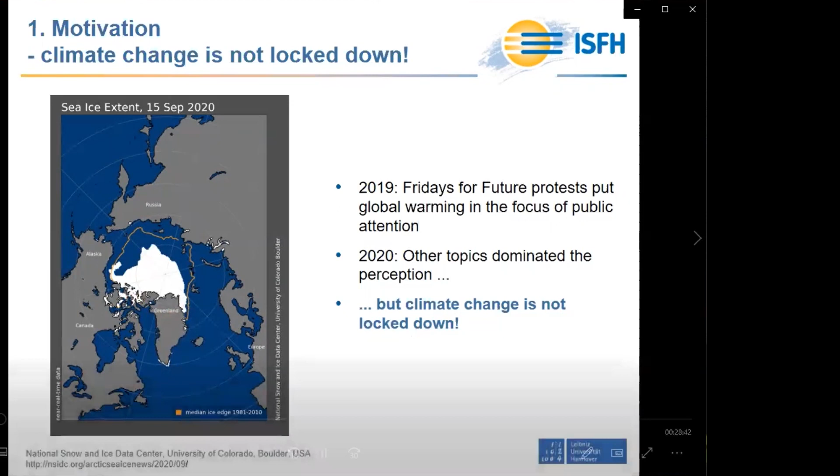As you can see here in this left-hand picture, for example, in the extension of the Arctic sea ice. It's shown here for September 15th this year. It's the white area, and you can also see the orange line, which represents for comparison the 30-year average of the Arctic sea ice extension at this point in time of the year. And this year, the Arctic sea ice extension was the second lowest ever recorded. That means that global warming is progressing, and it also means that we have to progress with the deployment of PV.

In this talk, I would like to focus on the technical question whether it's possible for a new player in this field to differentiate from the mainstream via a specific cell technology. This question is actually very difficult to answer because so many different solar cell technologies exist. To assess them systematically, I suggest focusing on their junction schemes. You all know that every solar cell requires two carrier-selective contacts. One is required to extract the electrons from the conduction band, and the other one is required to extract the holes from the valence band.

As you know, the solar cell has two contacts, and therefore you need to calculate a combined selectivity according to this equation. And as shown by Rolf Brendel et al., this combined selectivity can be correlated to an efficiency limit which is implied exclusively by the contacts. That means the solar cell is considered otherwise as ideal.

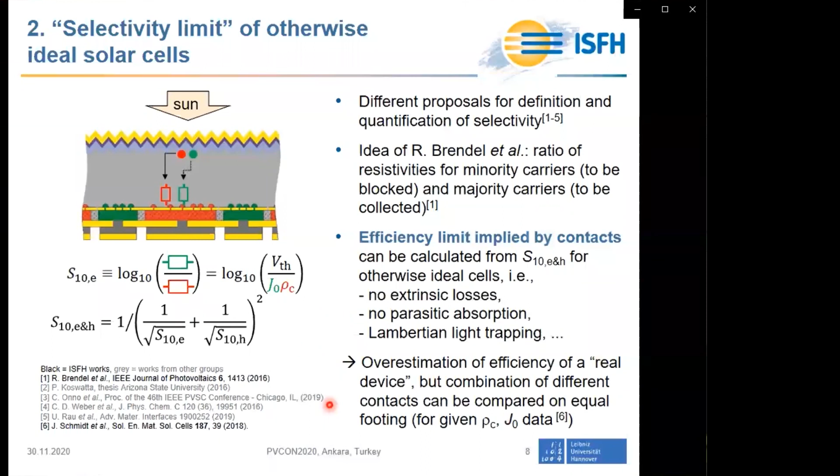No other extrinsic losses are taken into account, no parasitic absorption in these contacts is considered, and perfect Lambertian light trapping is assumed. Of course, this approach will yield an overestimation of the efficiency of a real device, but it nevertheless allows for a comparison of different combinations of contacts on equal footing for a given experimentally determined set of ρC and J0 data.

With this approach, we screened different contact schemes, electron collecting contacts and hole collecting contacts. We include different variations, including diffused junctions, for example phosphorus diffused junctions. We also include amorphous crystalline silicon heterojunctions, polysilicon and oxide based junctions, and also metal oxide based junctions. In total, this results in a very large table, but let's focus on the most relevant cases.

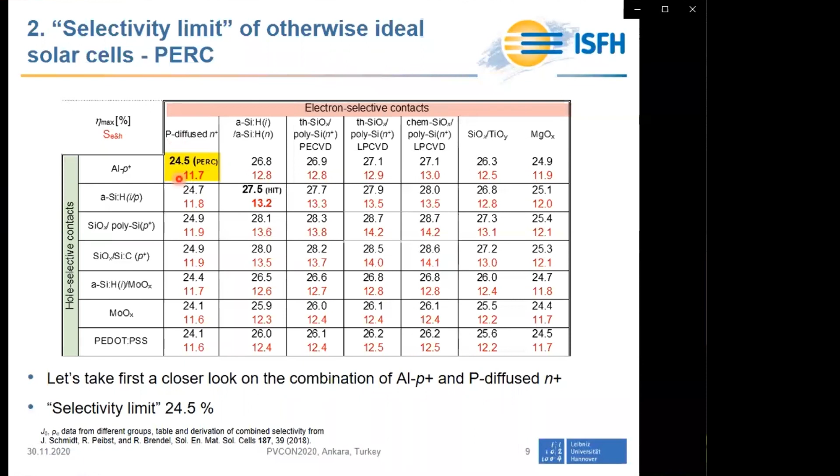The industrially most relevant case is the combination of a phosphorus diffused n-type emitter with local aluminum p+ hole collecting contacts, because this combination is implied in the so-called PERC cell, which is the workhorse of today's PV. For this combination, we calculated a combined selectivity of 11.7 and a resulting selectivity limit of 24.5% for the given J0 and ρC data as specified in this work.

Let's briefly consider the current status of this contact combination. As already mentioned, it's implemented in the so-called PERC or PERC+ cell structure as shown here. It was proposed already in 1989, and it has been transferred to mass production in the last years. The market share today is around 70%, and it's actually increasing.

The energy conversion efficiency of this cell concept has been improved almost linearly with time in the last years, with a rate of around 0.5% absolute per year, and it reaches now values of slightly below 22% for the leading companies. In 2019, already efficiency values above 24% have been announced for record R&D PERC cells.

It's worth mentioning that a PERC cell can become bifacial by not printing the aluminum on the entire rear, but rather printing aluminum fingers. We call this concept PERC+. And by this bifaciality, you can gain an additional energy yield of around 10% on an annual average at the latitude of Germany. And of course, the benefit will be even higher in more sunny regions.

All these features together make the PERC cell and this specific contact combination a very tough benchmark for any other cell concept. Nevertheless, it also has some inherent weak spots, in particular the recombination in the phosphorus doped n+ region, in the passivated regions, but also and in particular in the metallized regions, is significant and poses a certain efficiency limitation.

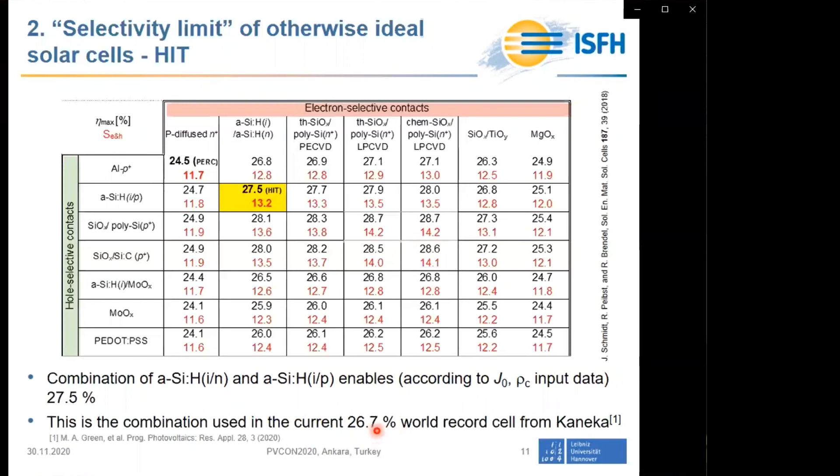and then a selectivity limit of 27.5%. And this combination is used, for example, in the current world record cell for crystalline silicon single junctions from Kaneka, which reaches an efficiency of 26.7%. So it's rather consistent with our simplified consideration.

Also for this technology, let's briefly consider the current status. Heterojunction cells are not a very new concept, but were rather proposed already a long time before. But currently, the mass production of heterojunction cells seems to gain momentum, as you can see here on this world map, showing different players in the heterojunction field.

The current R&D record for a heterojunction cell, full area measured, is 25.1%, achieved by the company Hanergy, and the median in mass production, for example at Meyer Burger, is above 24%. This technology has nevertheless also some weak spots. In particular, the capex is higher than for PERC.

Okay, let's move on to another very promising combination of electron selective contacts and hole selective contacts. In this case, consisting of a stack of a thin interfacial oxide covered with either P-type doped polysilicon for the case of hole collecting contacts, or N-type doped polysilicon for the case of electron selective contacts. These polysilicon layers may also contain other components such as carbon.

For all of these combinations, we obtain very high combined selectivity values, exceeding values of 14, and the corresponding selectivity limit is also very promising. It exceeds values of 28%. This combination of contacts was actually implemented also in our 26.1% cell, which is still the record for a homojunction silicon single junction cell.

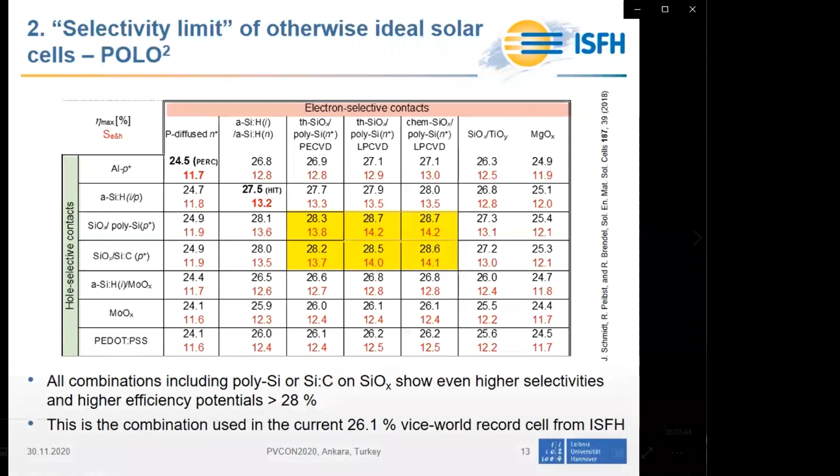Also for this contact combination, let us consider the current status of the technology. Before, I would like to spend some words on the history, because I would like to acknowledge that this junction scheme originates from the bipolar junction transistor community, where it was developed already in the 1970s. It was already applied on solar cells in the 1980s with rather moderate cell efficiencies, and then it was apparently forgotten for a long time.

Apparently means that companies such as SunPower may have worked on this junction scheme in the meantime, but they never disclosed it. For public photovoltaics, this concept was rediscovered in 2013 by ISFH and Fraunhofer ISE together at the same conference. Meanwhile, this has become a mainstream technology, and numerous groups and companies worldwide obtain excellent results.

Regarding the cell structure, for an implementation of both a polysilicon oxide junction collecting holes and a polysilicon oxide junction collecting electrons, the simplest cell structure you can think of is a double-side contacted cell with an unpatterned polysilicon oxide junction on the front and on the rear. In this case, the polysilicon layer has to be very thin, because otherwise you would suffer from parasitic absorption, and this thin polysilicon layer may need additional conductivity provided by a TCO.

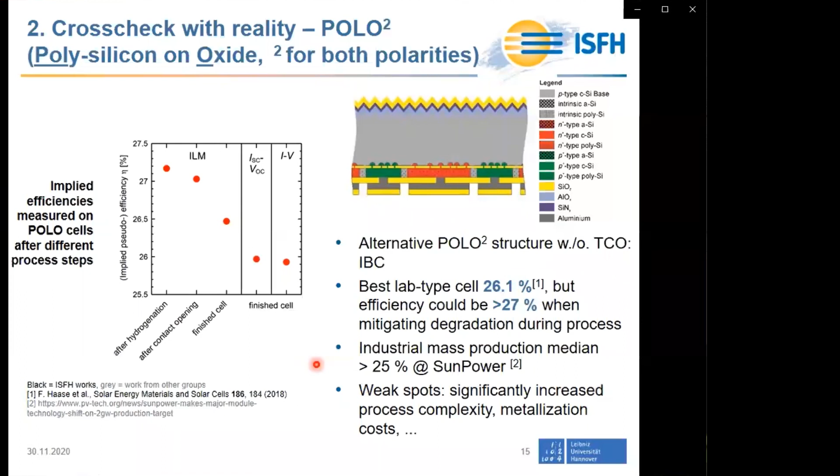Okay, let's move on with the combination of a polysilicon oxide junction with a conventional diffused junction. The most prominent cell structure including such a combination is the so-called TOPCon cell structure, which combines a conventional diffused boron front side emitter with a polysilicon oxide electron collecting junction on the rear. Unfortunately, we have missed the boron emitter here in the screening. Nevertheless, we think that the results for this combination are pretty much comparable to the results for the mirrored polarity case.

However, I also would like to acknowledge that on lab scale, even higher efficiencies up to 25.8 and 26% have been achieved. That means that some components, probably in particular the boron emitter, have better properties than we assumed for our selectivity screening.

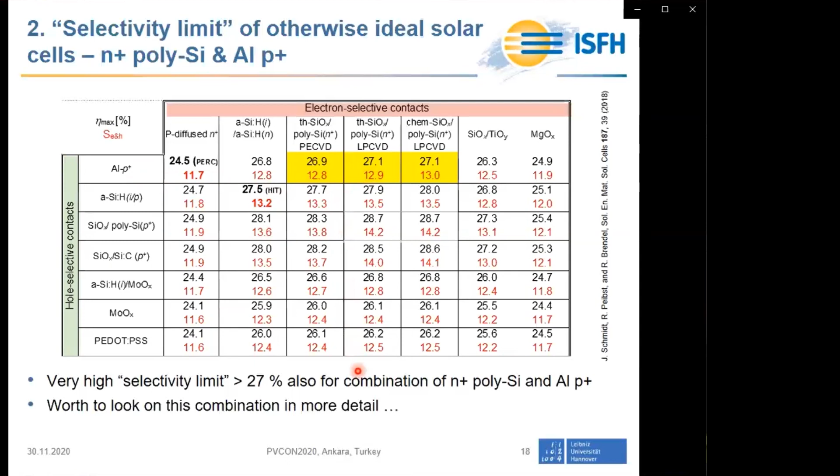To get a realistic assessment of the efficiency potential of this specific combination of an electron-collecting polysilicon oxide junction and a hole-collecting P+ region, we perform numerical device simulations to include all relevant extrinsic losses. We use the Quokka 2 implementation of the conductive boundary model and combine it with a synergistic efficiency gain analysis. The optical generation profiles are calculated by the ray tracing software Sunrays by using experimental n and k data for each layer, in particular also for the polysilicon.

One possible cell structure comprising this combination of an electron-collecting N+ POLO junction with the hole-collecting aluminum P+ regions is this POLO back junction cell as shown here. It features aluminum fingers on the front side, just like the rear side of a PERC+ cell. The simulated efficiency potential, according to our numerical device simulations, is 24.7%. This is lower than our selectivity limit of 27% for this contact combination, and the reason for this difference is that we here include all relevant extrinsic losses. Nevertheless, this efficiency potential is quite high, and it's significantly higher than that for the PERC benchmark.

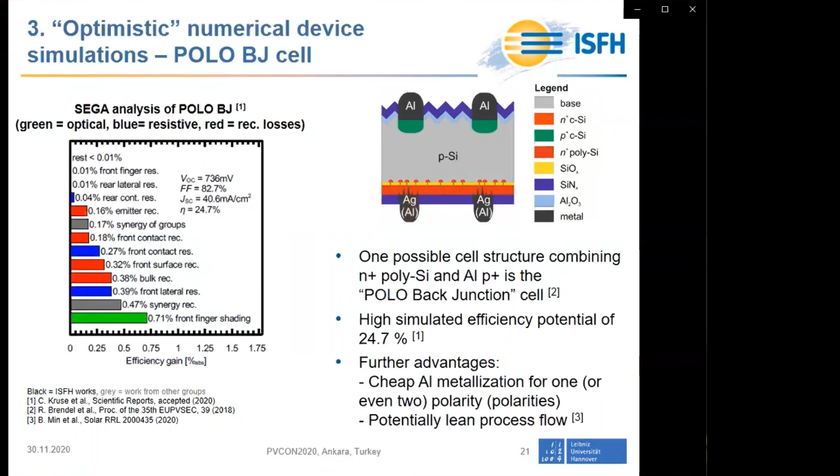To establish the ground contact, I would like to show you our recent experimental results for industrial POLO back junction cells. We have been working on this cell structure for almost 1 year now, and we already achieved an efficiency of 22.6% on full M2 wafers, as confirmed by ISFH CalTeC. In particular, the open circuit voltage is already quite promising. It reaches values of 716 millivolts, which is the highest value reported so far for P-type wafers with aluminum P+ regions. Of course, the simulated efficiency potential is not yet fully exploited, and the major reason for this discrepancy is the aluminum P+ regions, as shown here in this cross-section SEM image; the bright areas are the P+ regions.

They are quite narrow, surprisingly narrow, and not as good as we measured on test structures. One reason might be that for the full cell we also have to find a compromise for the firing temperature for the front side and for the rear side, and therefore the BSF formation is not yet as perfect as measured on our test structures. Nevertheless, we are making good progress here, and we are confident to improve our results quite soon.

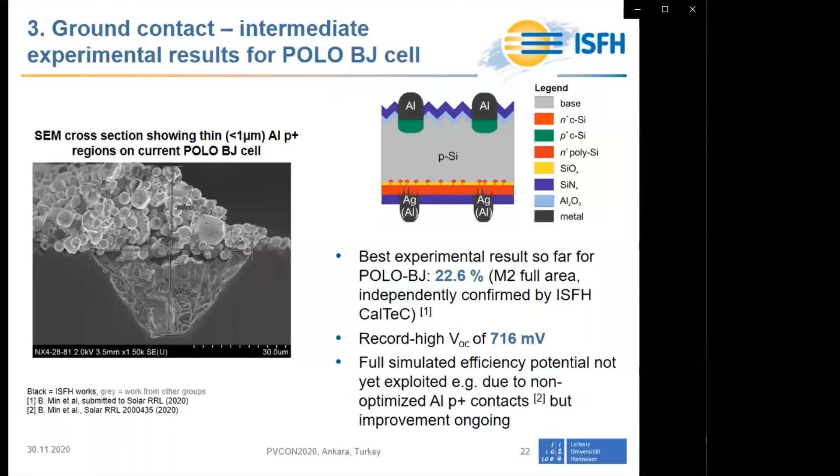Another interesting cell structure comprising this combination of electron collecting POLO junctions with local aluminum P+ regions for hole collection is this IBC structure shown here, which we call POLO IBC cell. For this cell structure, the simulated efficiency potential according to our numerical device simulations is 25.5%, including all relevant extrinsic losses. And this is very promising.

The synergistic efficiency gain analysis is shown here in the left-hand graph, and you can see that the optical losses due to finger shading have disappeared, of course, because it's an IBC cell, and the most relevant loss channels are recombination induced. There is a gray bar here, and this corresponds to the synergy of all recombination loss channels. That means, due to the leaky bucket principle, you could achieve an even higher efficiency than the sum of all recombination losses if you succeed in suppressing all recombination losses at once.

Again, the same advantages account here as for the POLO back junction cell, although the cell processing is a bit more complicated than for the POLO back junction cell. Nevertheless, it is still as lean as for the PERC cell.

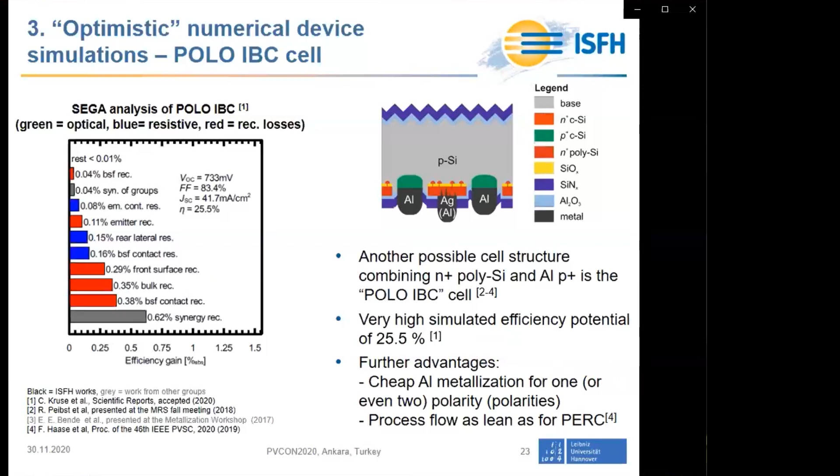For an at least almost complete overview on the different cell structures and junction schemes, I think it's necessary to also include silicon perovskite tandem cells into the discussion, because the development of this technology is really impressive. You're probably all aware of the current record of 29.1% achieved by HZB, which outperforms the record for silicon single junction cells already by far. Nevertheless, I think it's fair to remark that silicon perovskite tandem cells still have a long way to go to become mature and competitive with silicon single junction cells for industrialization. Nevertheless, let's assume that they are successful.

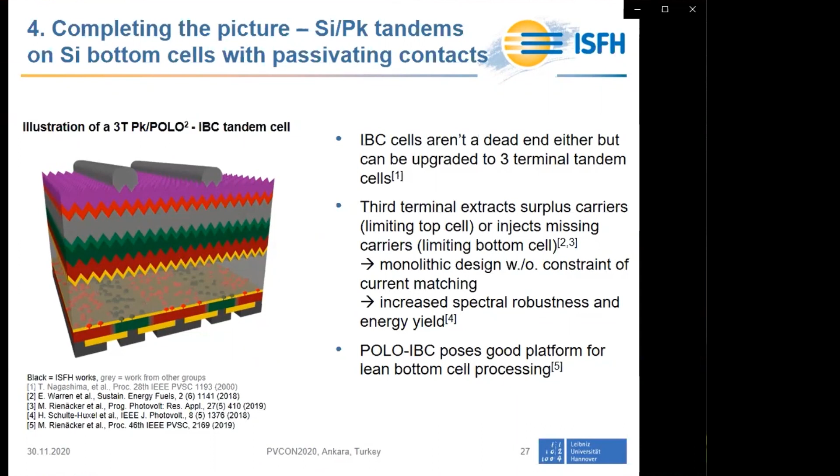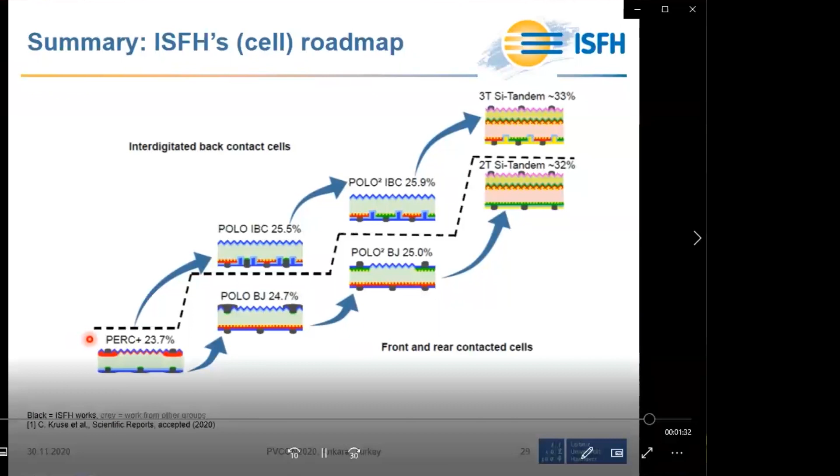As a summary, I would like to present you ISFH's cell roadmap. This cell roadmap is a consequence of all these considerations I've presented you previously in this talk. ISFH's background is identical to the current mainstream in crystalline silicon photovoltaics. It's in the PERC and PERC+ technology. And for this cell, we simulated an efficiency potential of 23.7% based on our numerical device simulations.

As I have reported, we are currently substituting this phosphorus-doped emitter by an electron-collecting n+ polysilicon oxide junction, either in this IBC configuration or in this POLO back junction configuration. For both cell structures, we obtain very high simulated efficiency potentials, and we think we are also on a good track with our experimental work.

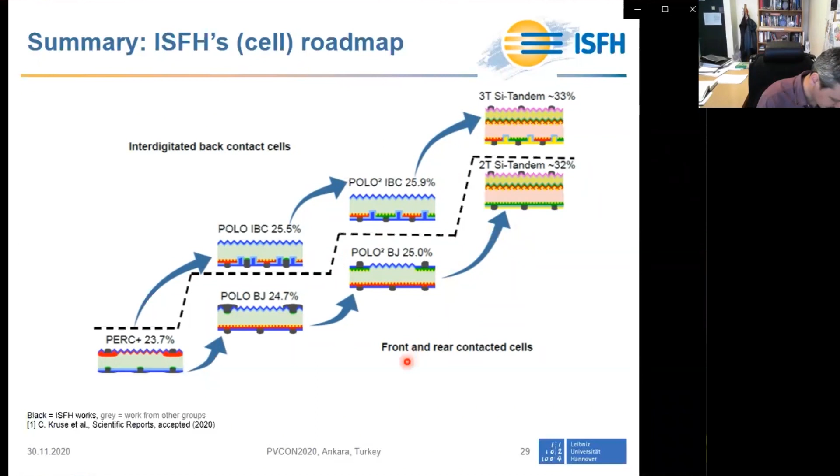We furthermore work also on smart concepts how to implement the second polarity also as a passivating contact by substituting the aluminum p+ region with a hole-collecting polysilicon and oxide junction, either in this double-side contacted configuration or in the IBC configuration. For both cases, eventually we can upgrade our cells to tandem structures by combining them with perovskite top cells to either a 3-terminal tandem device or a 2-terminal tandem device. We think that this stepwise approach offers a good compromise between risk minimization and innovation for each step.

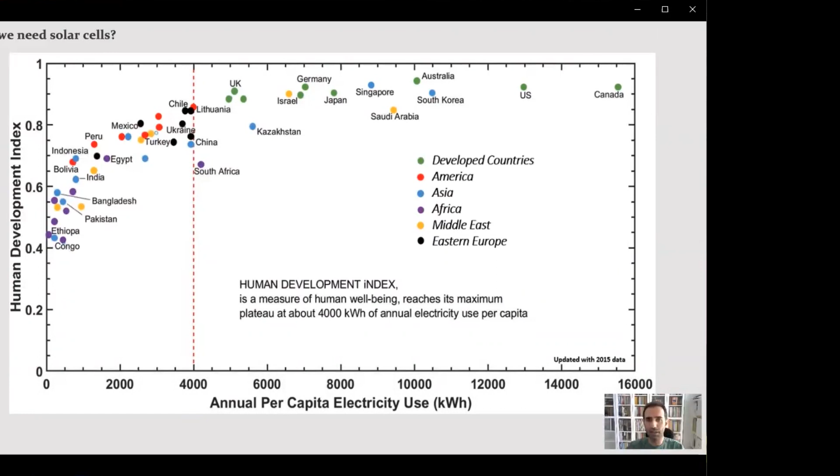This graph shows the Human Development Index versus annual electricity consumption per capita for countries in the world. HDI measures the quality of life. As you see, all developed countries like US, Canada, UK are at the top of the HDI and consume up to 15,000 kilowatt-hour electricity. However, the most populated countries such as China, India, Indonesia are still behind the 4,000 kilowatt-hour mark. Keeping this in mind, the next graph shows the electricity consumption versus per capita income instead of HDI.

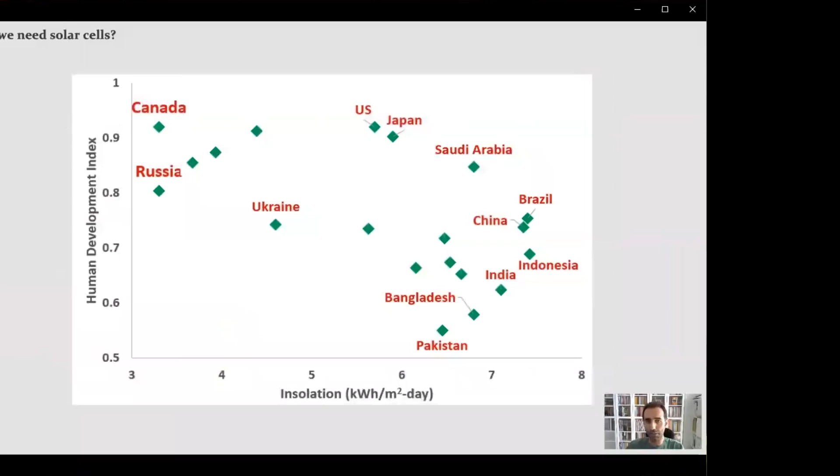Fortunately, surprisingly actually, all the countries that are ranked at the bottom of the HDI graph are at the top of the insolation map. India and Indonesia are more than 7 kilowatt-hour per meter square a day. And this is good news. The next question is whether solar resources are big enough to power the world. And the answer is yes. These circles are proportional to real values. The sun produces 23,000 terawatt per year while the world needs only about 16 terawatt. These circles also tell us why we need to favor solar among the other renewables, because it's a much bigger resource.

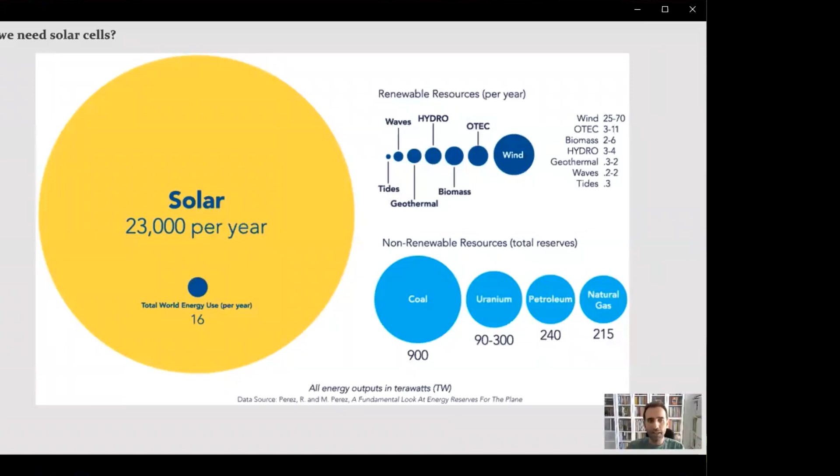So how do we utilize solar energy? One way is to use photovoltaics. A photovoltaic device is one particular embodiment of solar energy where it converts sunlight into electricity without generating any polluting byproduct. A solar cell is an optoelectronic semiconductor device in which, optically, the reflectance and shadowing on the illumination side of the cell need to be reduced. Electrically, the recombination at the surfaces and the bulk and the internal series resistances must be low. There are different types of solar cells, such as wafer-based and thin films. There are new generation technologies like perovskites, organic and quantum dot solar cells. My focus will be on crystalline solar cells.

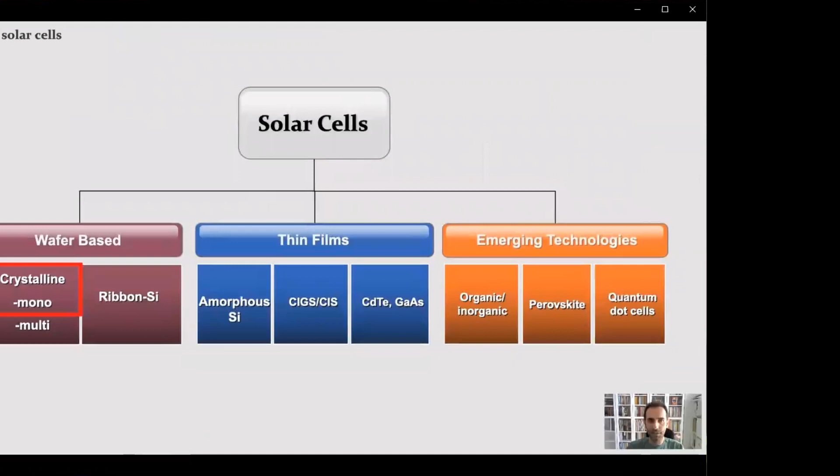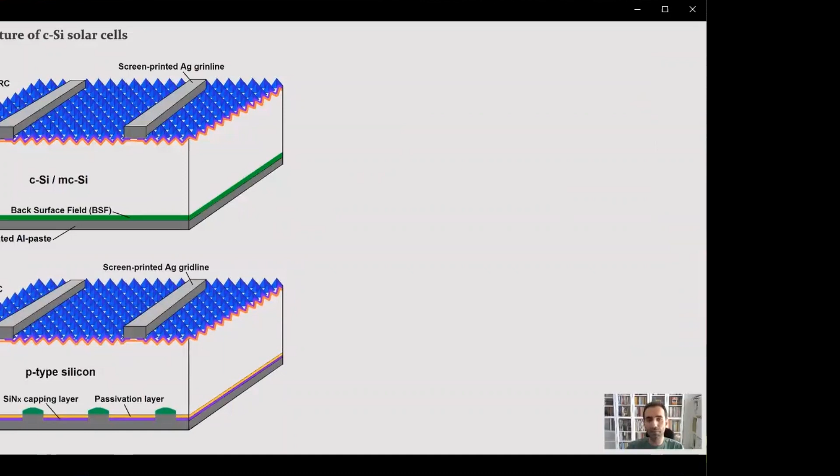In crystalline solar cells, there are also different architectures to better the performance. The first one is the aluminum back surface field structure that has a full aluminum back contact. It has passivation on the front surface and back surface field formation on the back side because aluminum alloys with silicon during high temperatures. This structure is the most common one in the industry because of its simplicity. The second one is the passivated emitter rear cell, or PERC structure, that is very similar to the aluminum BSF, except that there is a passivation stack layer on the back side and the back contact is local instead of full.

Interdigitated back contact is the next one. The fundamental improvement of the design of the IBC cell is zero metal shadowing on the front side, so the current would be maximum. And since the contacts are on the back side, series resistance can be lowered by increasing the width of the back contacts. The last is heterojunction with intrinsic thin layers. The silicon wafer is sandwiched between two intrinsic amorphous silicon thin films to maximize the open circuit voltage. The focus of this presentation will be the PERC type because it is the rising star in the PV market, predicted to surpass the aluminum BSF cell market share in the near future.

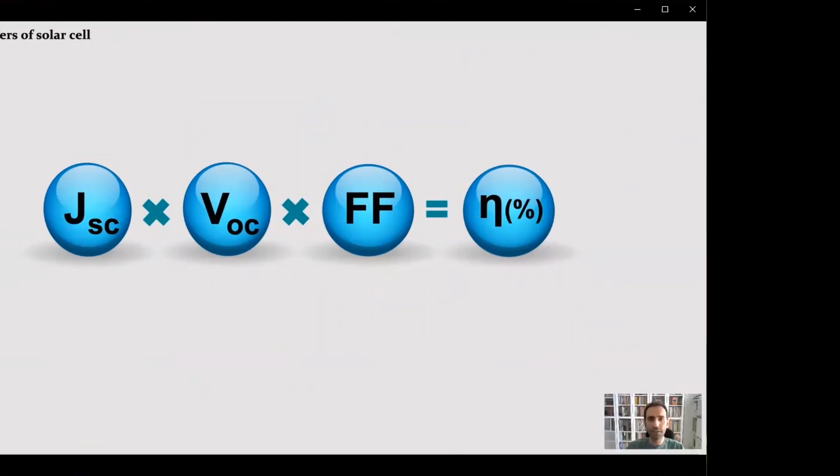Rather, it's all about the cost and performance. What is the measure of the performance? It is the efficiency that is the product of three parameters: short circuit current, open circuit voltage, and fill factor. This means that to increase the efficiency, all the three parameters must be increased simultaneously.

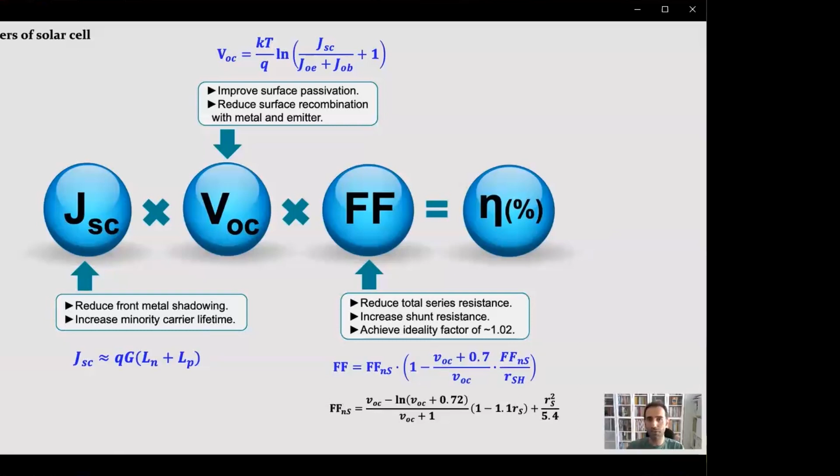To increase the short circuit current, we need to reduce the front metal shadowing and increase the minority carrier lifetime. Open circuit voltage is a function of short circuit current and can be increased by improved passivation and reduced recombination. Fill factor is a function of open circuit voltage, series resistance, and shunt resistance. To achieve high fill factor, we need to reduce total series resistance and increase the shunt resistance.

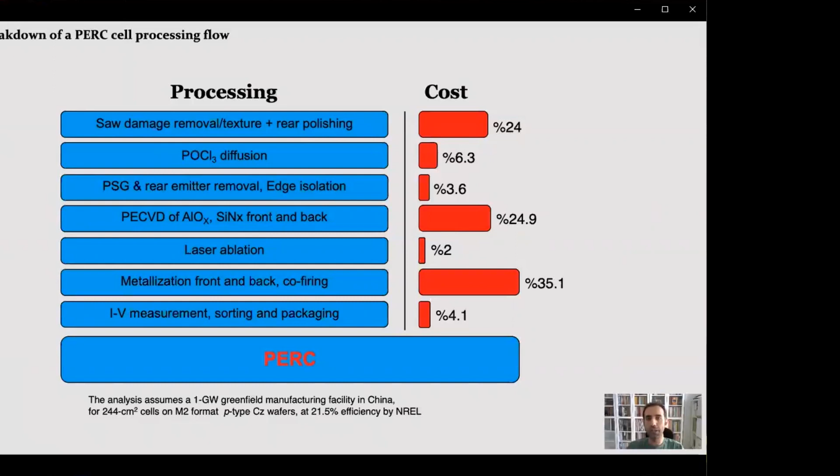For PERC cells, it is only 35.1%. So that's why the metallization of a silicon solar cell is an important task to tackle to be able to lower the cost. Besides metallization cost, it also affects so many variables in a solar cell. Metallization has both optical and electrical impact on a solar cell. Optically, the shadowing loss can make or break the cell, depending on the grid line and busbar width. And electric-wise, the components of series resistance, like grid line and contact resistances, can be affected by the metallization.

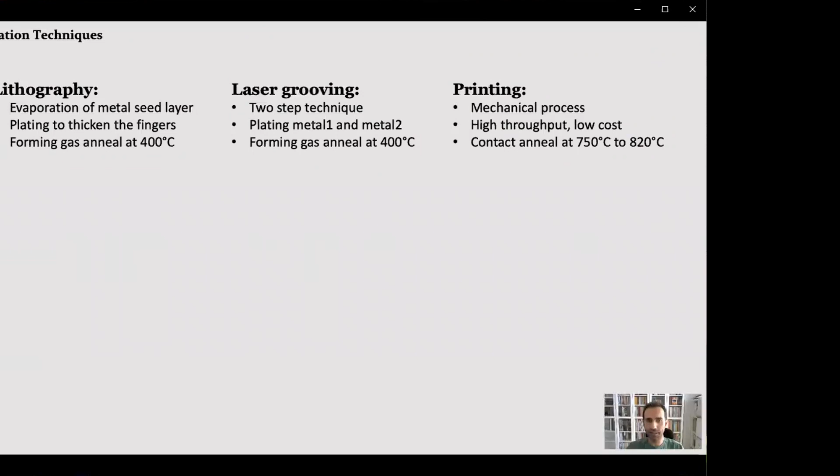There are different ways of metallization of solar cells, such as lithography, laser grooving, plating, and printing. Lithography uses a mask and a UV light source. On the other hand, laser grooving utilizes the laser and plating at the same time. Plating itself is a chemical process, and chemical waste is its biggest problem. Also, low throughput of these techniques is another big challenge to tackle. On the other hand, printing can have as high throughput as 4,000 solar cells per hour, which is a big plus, and also its simplicity is what attracts the market the most.

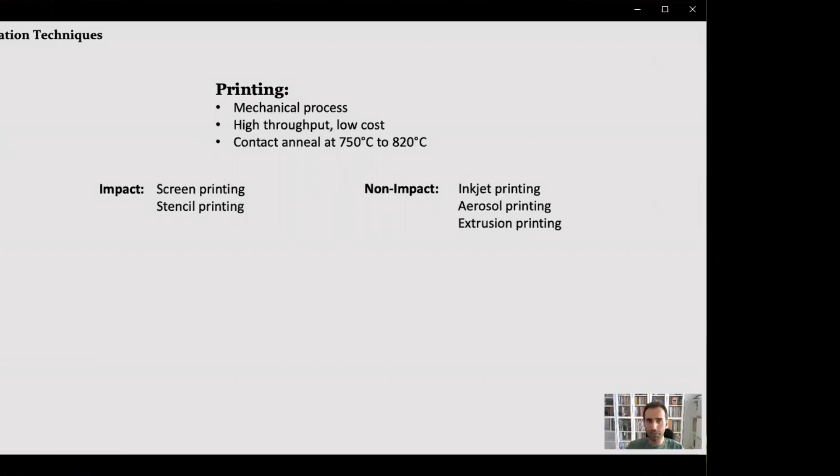Printing can be categorized as impact and non-impact printing, which points out if the process happens by touching the solar cells or not. Non-impact includes inkjet printing and aerosol printing. Even though these are promising techniques, there are no proven industrial level machines. Impact printing includes screen and stencil printing methods that are very similar to each other. Of all these, screen printing is what dominates the market. It is the most mature, best established solar cell metallization technology.

The basic principle of the screen printing process is simply to use a mesh screen to produce the same pattern over and over again on silicon wafers with a metal paste. During the printing, paste is first applied to the screen before the movement of the squeegee. As the squeegee moves the paste across the screen, a shearing action causes a decrease in viscosity, allowing the paste to pass through the mesh openings to the desired silicon substrate. The main factors that influence the printing quality are related to the screen, squeegee, and the metal paste.

Metal particles provide the conductivity since they are the metal bulk. Glass frit etches through the anti-reflection coating layer during contact firing. Because the paste is printed on the ARC layer and the metal should make a contact with the emitter, the ARC layer should be etched. Organics and solvents, on the other hand, account for the rheology of the paste, like how viscous it is or its printability. For the backside, thin aluminum paste is used and screen printed on the backside.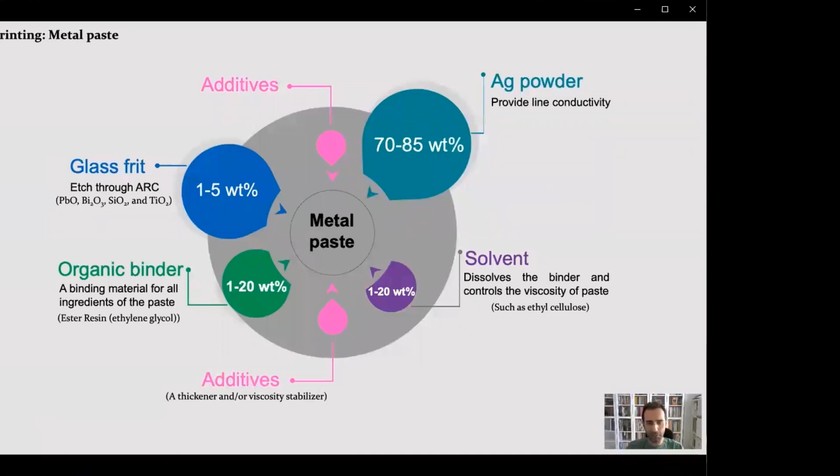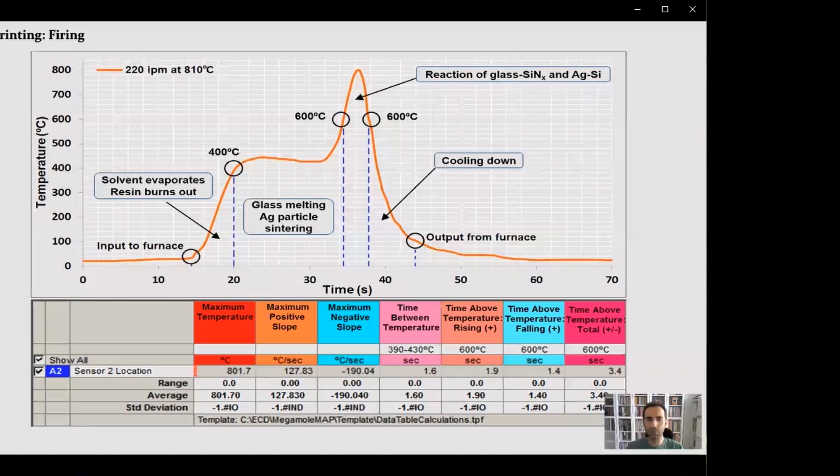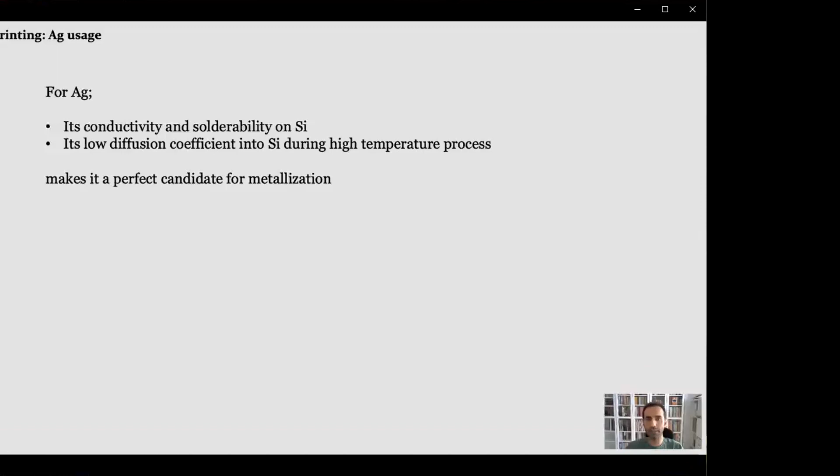Screen printed silver contacts have been the most utilized metal because of silver's excellent conductivity and solderability onto silicon. Its relatively low diffusion coefficient into silicon guarantees good contact with the substrate. Despite its great electrical advantages, its cost corresponds to almost 40% of the total cost. This is proportional to the width of the fingers, because the wider the finger, the more silver is used.

For example, in early 2000, the contact width was around 200 micrometers, and that corresponded to almost 350 milligrams of silver per cell. As of today, with improvements in screen printing and optimization of the pastes, the average width is 45 to 50 microns, which is around 100 milligrams per cell.

Considering that the purpose of the PV market is to dominate the energy supply, the amount of silver adds up when the market grows. The Silver Institute recently reported that almost 9% of silver production goes to photovoltaic manufacturing. Keep in mind that today only 2 or 3% of electricity consumption is met by PV. What would happen if this number goes up to 20% or even 30%? Can silver as a precious metal keep up the production? And that's the big question. That's why we need alternatives.

If we are to use screen printing for the next 30 years, as ITRPV reports predict, then these are the solutions we can come up with. Finer line printing to lower the amount of silver, which can translate to less than 15 micron contact width for 50 milligrams per cell. Another option is to use other metals instead of silver, such as nickel and copper. And there is one more option, that is optimization of the interface between silver contacts and the silicon emitter, so the efficiency can be better and the cost can be lower.

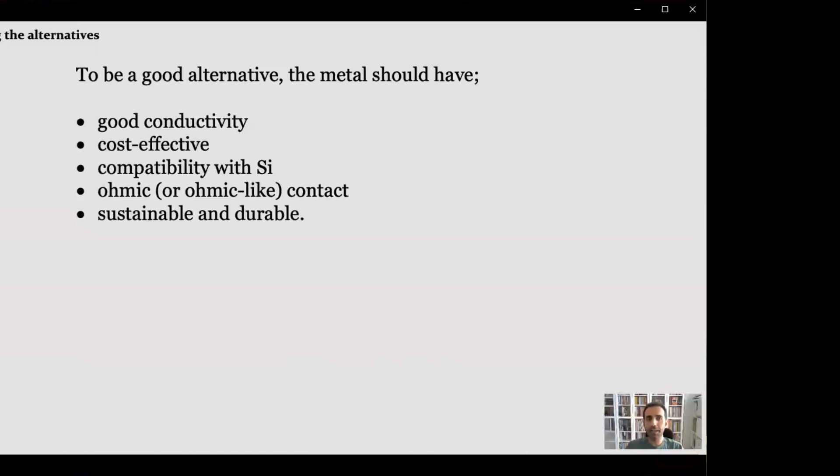After fine line printing, our second option is utilizing alternative metals such as nickel and copper. To do so, there are some criteria these metals should meet. They should have good conductivity, must be cheaper than silver, need to work well with silicon substrates, and should be durable. Most importantly, they should make an ohmic contact with silicon. Nickel and copper are surely cheaper than silver, and they have good conductivity. So let's look at how they work with silicon.

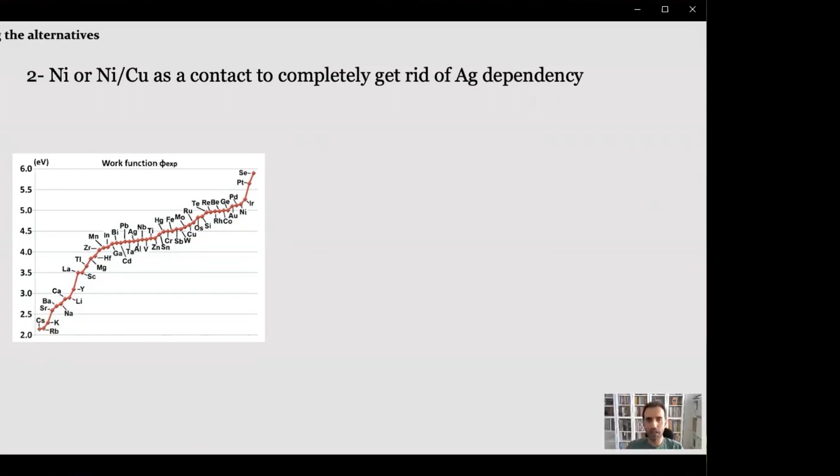This graph shows the work functions for different metals. Considering silicon has a 4.08 eV electron affinity, copper and nickel have higher metal work functions. This will result in a Schottky barrier height that causes the contact resistivity. This detrimental effect is caused by Fermi level pinning. Fermi level pinning arises from the surface states of the semiconductor and happens for most used semiconductors such as silicon.

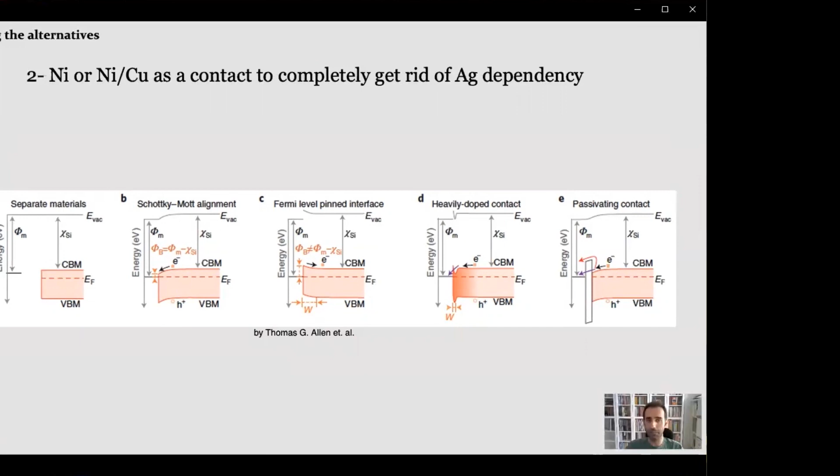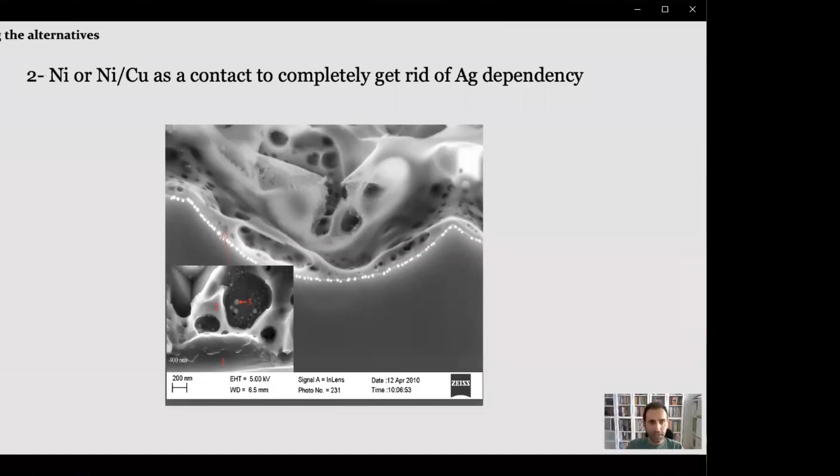But there's also an anti-hypothesis that the glass layer might include some semi-metal nanoparticles that you see in the scheme that can make this residual glass layer obsolete and act as a transition layer for thermionic current flow. So it cannot be acting as a passivating layer when we talk about the energy band diagram.

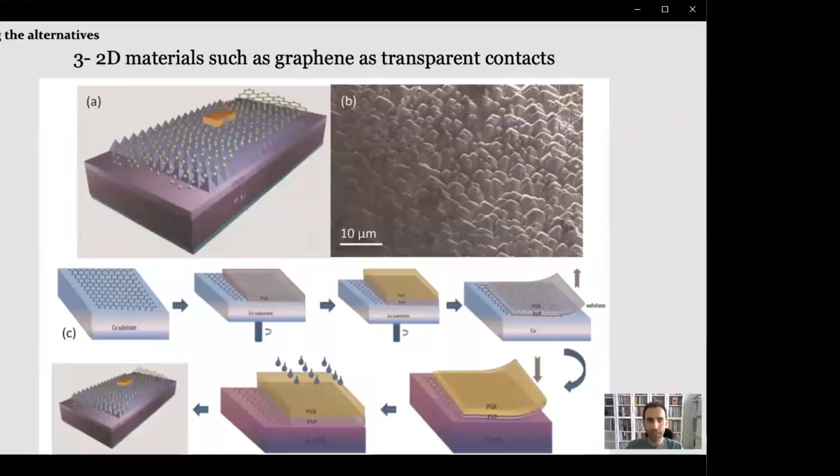So another option to tackle this silver problem is to use 2D materials, such as graphene, as a transparent contact. A new dry transfer method of graphene as transparent electrodes in textured silicon solar cells was recently reported by Yuan Zheng and his group in China. Even though it sounds great to have nothing on the front surface, considering graphene is transparent up to 95%, the technology is promising, but it needs to be developed. As you see, the current density is suffering due to the lack of carrier collection.

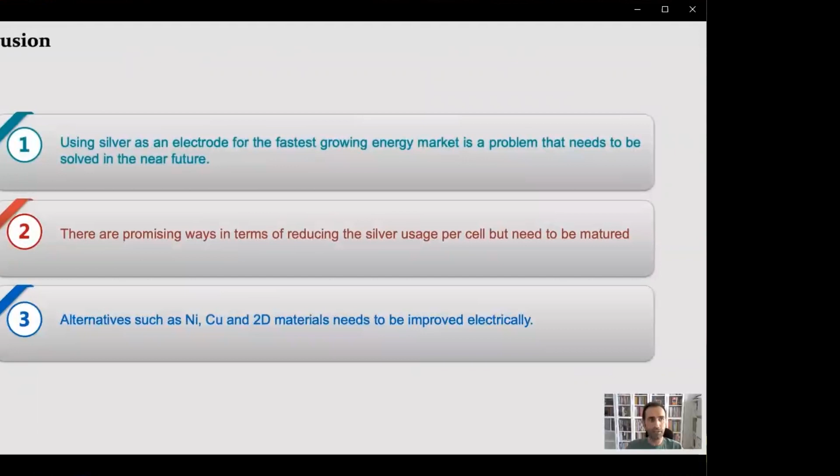So, as you see, there are many studies to challenge the issue silver usage brings to the table, but they are not as mature as current technology, silver contacts, to be adopted by the industry. So I will conclude my presentation with these points. Using silver as an electrode for the fastest growing energy market is a problem, and that needs to be solved in the near future. There are promising ways in terms of reducing the silver usage per cell, but they need to be matured by designing our screens better or by making better paste.

And the third and last option is using alternatives such as nickel, copper, and 2D materials, and they need to be improved. But before they are adopted, they need to be improved electrically, because we cannot afford to lose the performance of the cell in terms of cost saving.

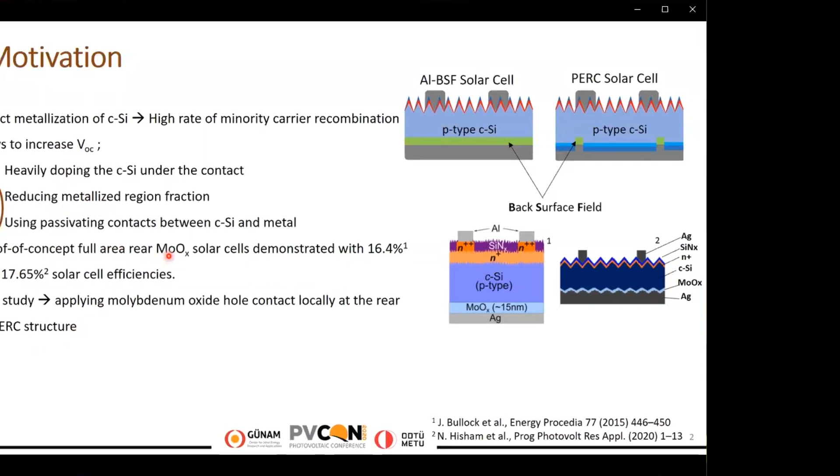So this study focuses on the latter two ways for VOC increase by applying partial molybdenum oxide hole contact at the rear of the PERC structure. Substoichiometric molybdenum oxide's ability to form hole contacts is related to its large work function that promotes hole accumulation at these local regions created.

One of the advantages of using molybdenum oxide instead of directly metallized contacts is the low deposition temperature of molybdenum oxide and subsequent silver rear contacts. This also preserves bulk lifetime together with low thermal budget. Another advantage is increased rear reflectivity, which enhances light trapping. The other advantage is low contact resistivity of the molybdenum oxide/p-type crystalline silicon contact with moderate passivation performance of the molybdenum oxide layer.

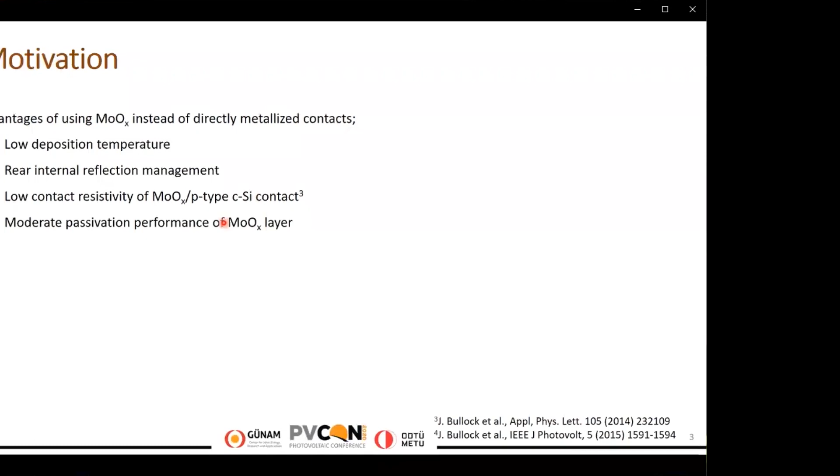Only one work is reported until now where hole collecting molybdenum oxide is utilized in PERC, achieving efficiency over 20%. However, high bulk quality float zone wafers were utilized on small area, 4 square centimeters, and molybdenum oxide/silver rear dot contacts are defined by photolithography, which are not compatible with standard industrial cell processing.

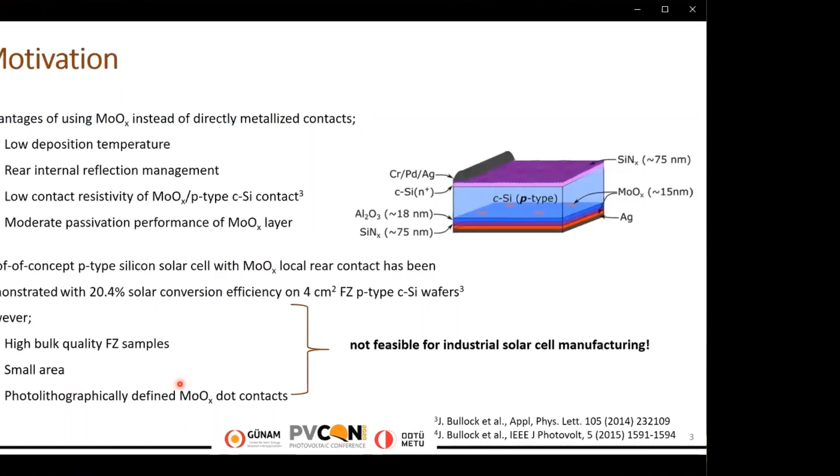So in our design, standard industrial processing and industrial equipment are utilized to fabricate PERC with molybdenum oxide/silver local rear contacts. We started with p-type Czochralski solar wafers with 180 micrometer thickness. Double-side texturing is performed to form pyramid texturing. Then the emitter layer is formed by phosphorus diffusion on both sides. A subsequent rear side doping removal is performed by single-side etching.

The rear side is passivated by 5 nanometer aluminum oxide, followed by activation annealing and silicon nitride capping. The front side anti-reflective coating silicon nitride is also deposited by PECVD. Local contact openings were performed by picosecond laser at the rear side with approximately 7% of total area.

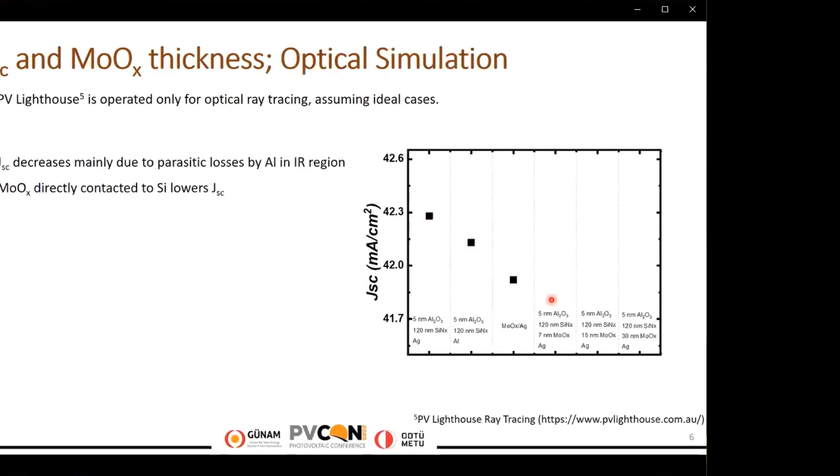First, a 5 nanometer aluminum oxide and 120 nanometer silicon nitride/silver stack is utilized. These are all full area, and JSC decreases when using aluminum instead of silver, mainly due to parasitic losses by aluminum in the infrared region. When molybdenum oxide directly contacted the silicon, JSC lowers, and introducing the aluminum oxide/silicon nitride stack improves JSC when 7 nanometer molybdenum oxide is used, and molybdenum oxide thickness increased to 15 nanometer.

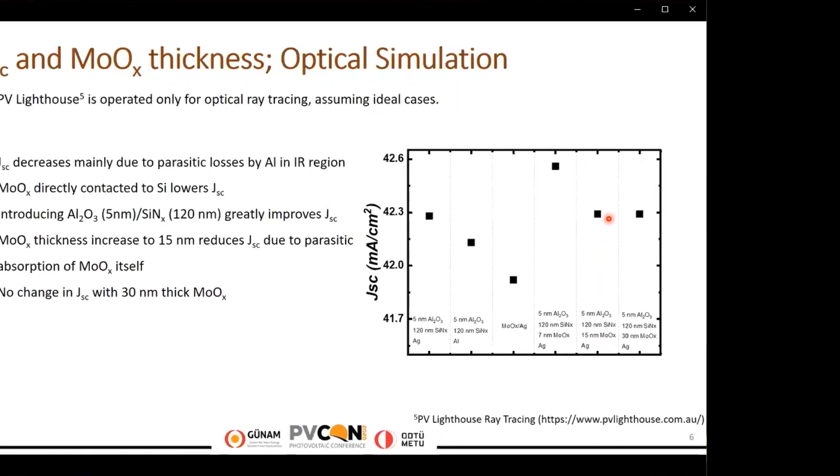And 7 nanometer molybdenum oxide exposes part of the silicon surface to silver, resulting in increased recombination, which leads to low VOC. 25 nanometer molybdenum oxide also imposes extra resistance losses, which causes high contact resistivity and low fill factor, and more parasitic absorption of light due to increased oxygen ion concentration with increasing molybdenum oxide thickness, resulting in modest EQE response and lower JSC.

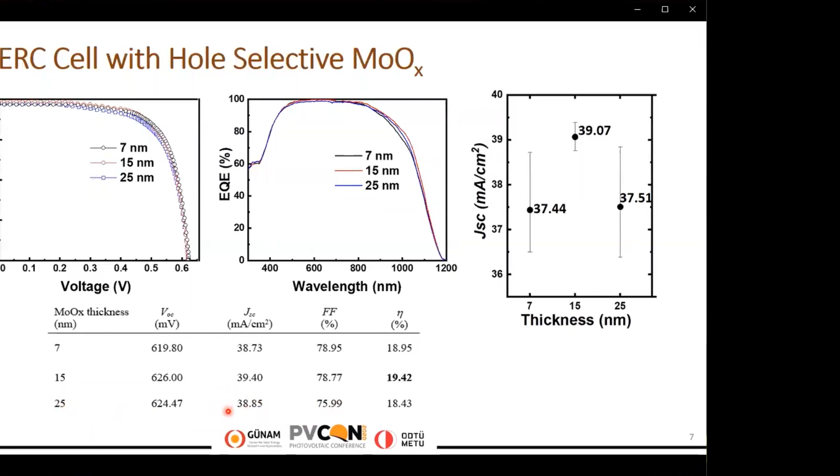Fill factor values show a decreasing trend with increasing molybdenum oxide, as shown in the figure, which is attributed to the increase in the contact resistivity, which is measured by the Cox and Strack method. However, the average fill factor of 7 nanometer thick molybdenum oxide is slightly lower than that of 15 nanometer, while the contact resistivity of 7 nanometer is smaller than the contact resistivity of 15 nanometer.

This suggests there exists local non-ohmic behavior imposing resistance losses arising from the direct contact between silver and p-type silicon through 7 nanometer molybdenum oxide. And this is in line with the low VOC reported from 7 nanometer molybdenum oxide. And 7 nanometer molybdenum oxide cannot fully cover the laser processed surface, resulting in defective local silver-silicon zones with high recombination rates.

And PERC solar cells with 15 and 25 nanometer thick molybdenum oxide exhibit identical VOC values of around 625 millivolts, suggesting better surface coverage for these thicknesses. A clear correlation between different aspects of molybdenum oxides, such as contact resistivity affecting fill factor, surface coverage affecting mainly VOC, and parasitic absorption in the infrared affecting JSC, and PV characteristics is observed. These parameters are shown to be strongly interrelated and dependent on molybdenum oxide thickness.

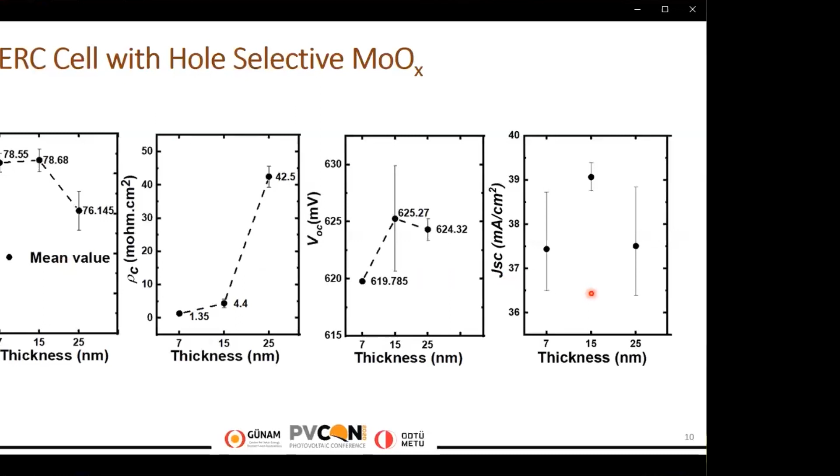In order to improve the open circuit voltage of the PERC with molybdenum oxide solar cells, another cell was fabricated with additional passivation improvements. Starting wafers, texturing, diffusion, and single-side etching processes were kept the same as in previous studies, while 1 nanometer aluminum oxide is added under the front antireflective coating for better chemical passivation on the front side.

The local contact opening was reduced to 3% from 7% in order to compare the results with the optimized homogeneous emitter PERC structure we fabricated with industrial tools. The other steps were kept constant and only one molybdenum oxide thickness was used, which is 15 nanometers, since we obtained the highest efficiency results when using 15 nanometer molybdenum oxide, as already mentioned.

With the additional front-side passivation, VOC enhanced by 11 millivolts, while JSC is around the same values. However, the fill factor reduced drastically, while the fill factor of the reference PERC is higher than the PERC with molybdenum oxide structure. And all the variations indicate the rear contact formation is problematic and needs to be analyzed and developed for further efficiency enhancement.

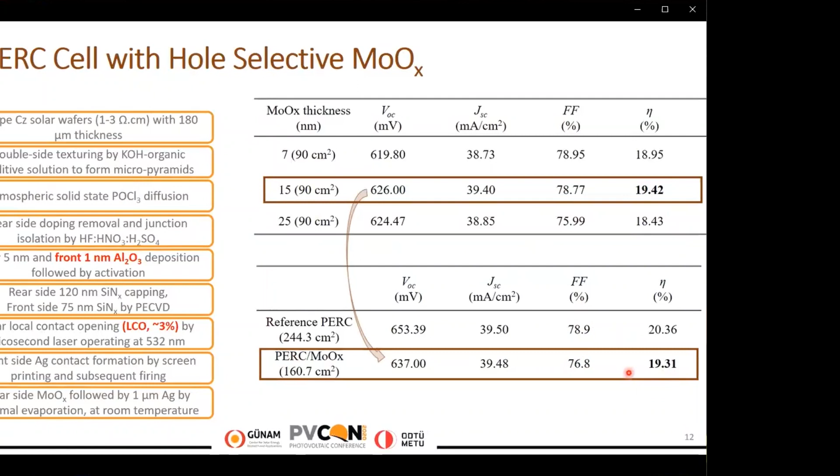But the area of the PERC with molybdenum oxide solar cell is much larger than the record efficient cells, with a little efficiency loss. Still, further optimizations of front-side doping and silicon nitride passivation recipes are needed together with the contact formation analysis. And still, the VOC of the solar cells produced needs to be developed.

For further improvements on VOC, symmetrical passivation structures were fabricated to mimic the rear side of the homogeneous emitter PERC structure as shown. First, the aluminum oxide thickness is varied from 2 to 30 nanometer, applying the two-step activation anneal used in the case of all the produced solar cells up to now. And implied VOC results show that the maintained high passivation level of 30 nanometer thick aluminum oxide is because layers with these thicknesses can themselves provide the hydrogen necessary to achieve chemical passivation of the silicon surface.

And implied VOC improves after firing the 2 nanometer aluminum oxide silicon nitride stack. And this improvement is because hydrogen diffusion from silicon nitride to the silicon aluminum oxide interface is more feasible through the 2 nanometer layer, improving chemical passivation.

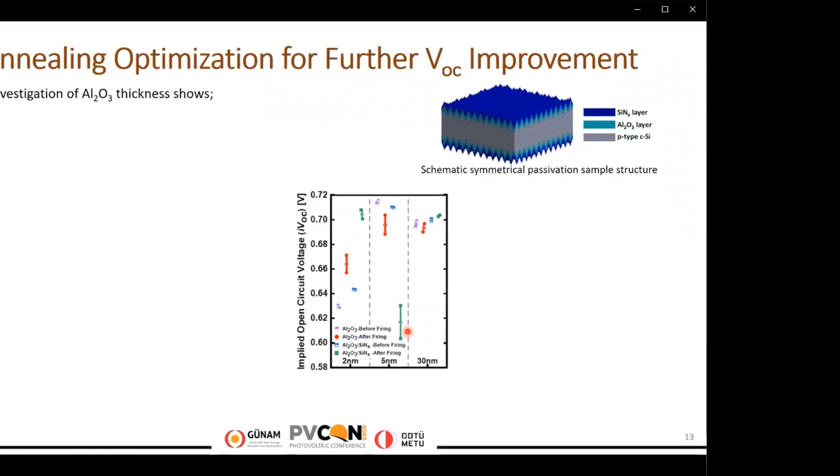On the other hand, the firing reduces the passivation quality of 5 nanometer aluminum oxide, since 5 nanometer may be thick enough to partially hinder hydrogen diffusion from silicon nitride to the interface. Still, there might be potential for the various post-deposition treatments to have different impacts depending on aluminum oxide thickness, especially regarding hydrogen diffusion.

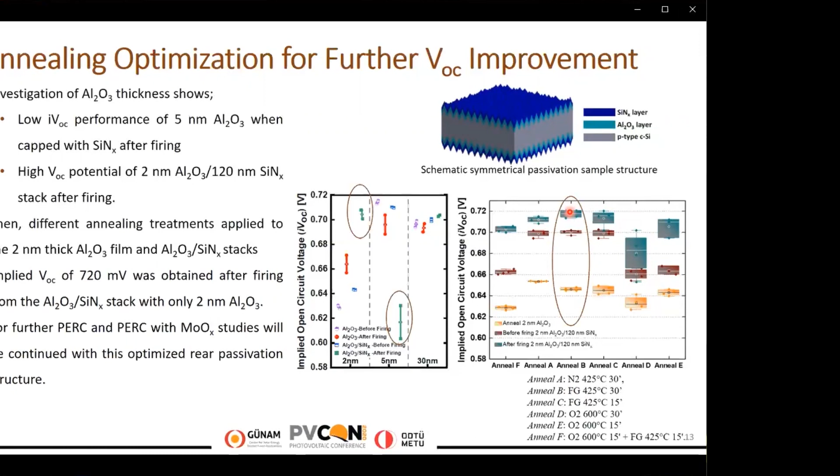Different annealing treatments were applied to 2 nanometer thick aluminum oxide film and aluminum oxide silicon nitride stacks. For 2 nanometer aluminum oxide, forming gas anneal at 425 degrees for 30 minutes seems more advantageous in terms of VOC, reaching implied VOC of 720 millivolts here. So for further PERC and PERC with molybdenum oxide studies, this stack with this annealing will be employed in order to reach higher cell VOC levels.

To conclude, 90 centimeter square, 19.42% efficient PERC with rear local molybdenum oxide silver contact has been realized by industrial tools. Photovoltaic parameters are shown to be strongly interrelated and highly dependent on molybdenum oxide thickness. For VOC improvement, aluminum oxide thickness and activation annealing studies were performed and will be utilized in the upcoming studies. And fill factor improvement will also be addressed for the rear side of large area PERC with molybdenum oxide structure.

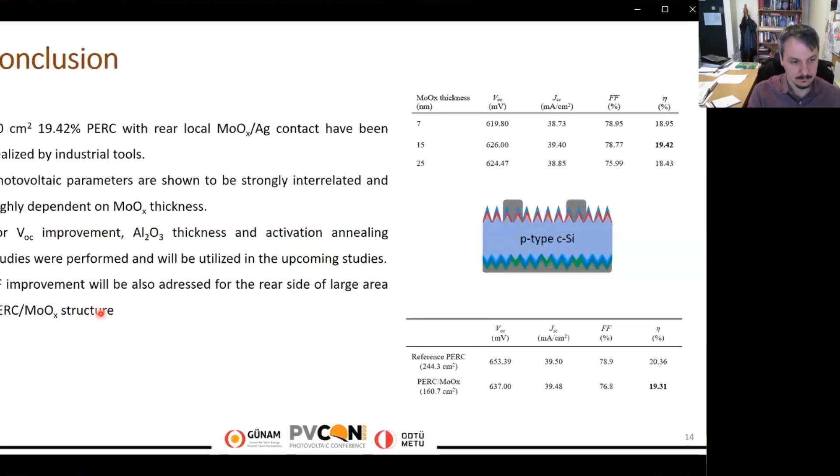Thank you, Gamze, for this very nice presentation on utilization of molybdenum oxide in PERC solar cells. I will have one question at least. As you realize, replacing a material or adding a material into the process is quite an engineering process, not only thickness, but also the firing process. So have you done any changes in the firing process, or is it the standard firing process? Can you mention the firing as well?

Yes, thank you for this question. For the firing, the optimizations were done on the standard PERC structures first, and then molybdenum oxide deposition. But this firing is for the front surface, since for the back side we are not doing a firing process after deposition. So we did the optimizations only for the front surface of the PERC structure, then applied them to the molybdenum oxide PERC structure.

Okay. But the temperature profile that molybdenum oxide undergoes can also affect the performance. Do you see any difference in molybdenum oxide performance when you change the firing temperature on the front side, or you haven't changed it yet? Actually, after molybdenum oxide deposition and subsequent silver deposition, we are not performing firing. It's already done before. Okay, I got your point.

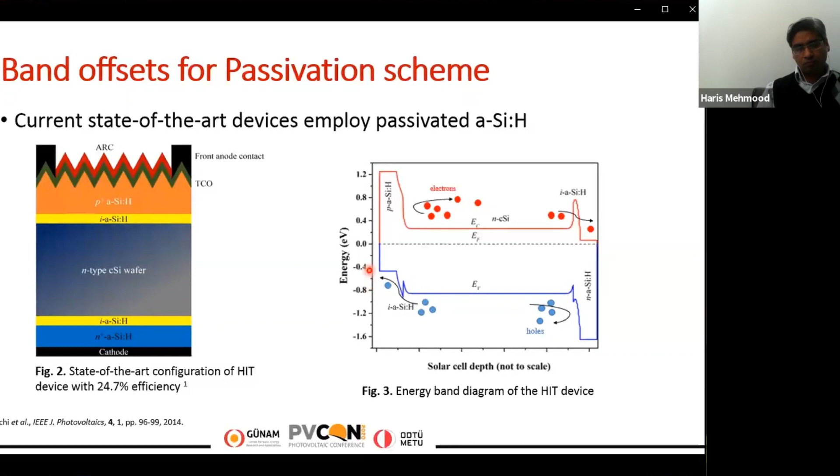So we propose the dopant-free layer, the solar cell with the dopant-free layer. So the purpose is to alleviate the dopant-related concerns as well as to improve the band offsets of the passivated layer for improving the charge transportation characteristics. So such type of solar cell is known as dopant-free asymmetric silicon heterostructure solar cell.

So typically in such DASH solar cells, we try to replace the doped amorphous silicon layers with the respective carrier selective film. The hole selective layer will be replaced with molybdenum oxide or some other high work function material, and the N-type amorphous silicon layer will be replaced with some low work function material of transition metal oxide.

So we propose tungsten oxide as a hole selective layer for our structure, and titanium dioxide for our electron selective film layer. So the basic purpose of implementing tungsten oxide is that it tends to replace the p-type amorphous silicon because of its high work function of around 7 electron volt. So the advantage of employing high work function is that it induces the inversion of the crystalline silicon surface on both sides.

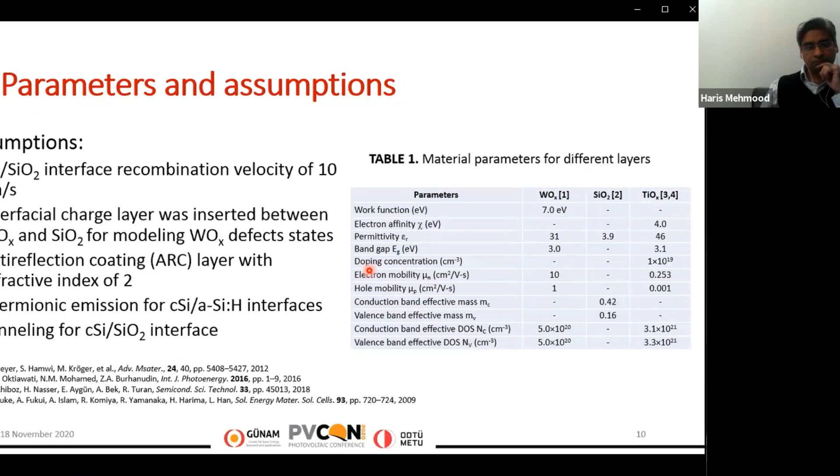Now we come to the results and discussion. As a result of implementing the high work function material with the crystalline silicon, it induces band bending. A significant amount of band bending happens at the crystalline silicon and molybdenum oxide interface. So molybdenum oxide is also a transition metal oxide layer. It is also a hole selective layer with a high work function of around 6.9 electron volt, which is similar to the work function of

Now the effect of tungsten oxide work function on the band bending. So we can see that upon increasing the work function of tungsten oxide, the energy barrier against the minority electron is increasing at the top anode interface. So if we decrease the work function of tungsten oxide, as shown in the blue color, as we can see for the conduction band, on the right side is the conduction band figure, on the left side is the valence band figure.

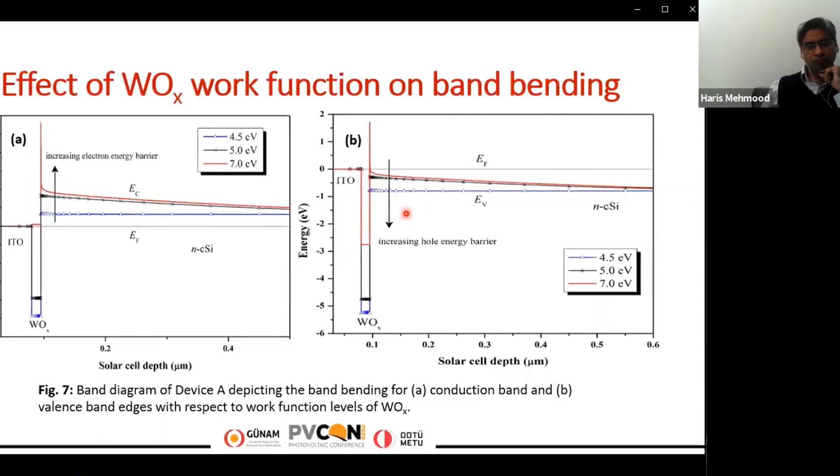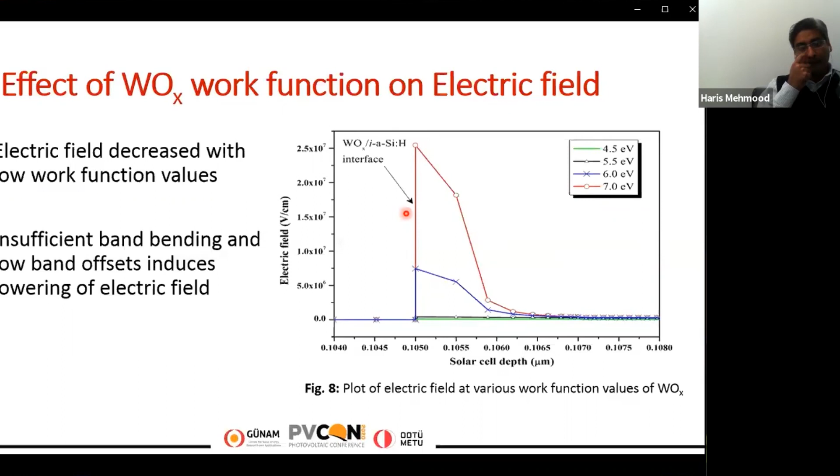Electric field is also affected as a result of the tungsten oxide work function. We can see that the electric field decreases with the low work function values of tungsten oxide. This is because, as we have seen in the previous slide, at low work function values of tungsten oxide, insufficient band bending would warrant low band offsets that will ultimately lower the electric field.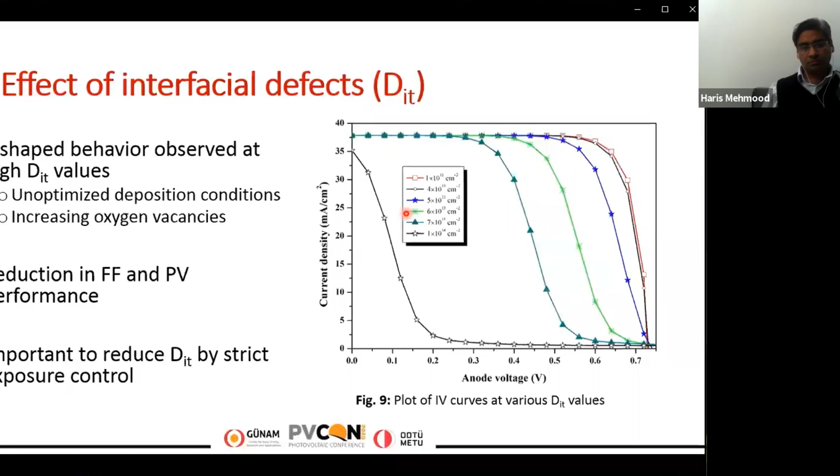So by decreasing the oxygen vacancies, the Fermi level will be pulled away from the conduction band minimum, so the work function value will increase. So it is very, very important to reduce the interfacial defects by strict exposure control.

Similarly, we have also studied the influence of the titanium dioxide electron affinity on the band bending. Part A shows that at a low electron affinity of 3 electron volts, the electrons coming towards the cathode will be easily transported, like a thermionic emission happening. So they will be easily transported towards the cathode contact.

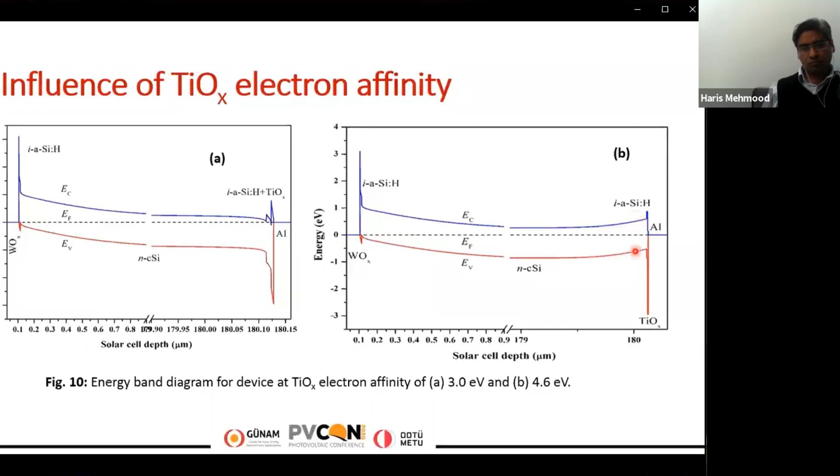But if we increase the titanium dioxide electron affinity to 4.6 electron volts, as shown in figure B, then there will be some band bending happening near the cathode interface as well. This increase in the electron affinity of the titanium dioxide will try to trap the electrons at the cathode interface, thereby leading to recombination with the holes, hence a decrease in the photovoltaic performance would be observed.

This means that even highly energetic electrons will have difficulty hopping over the silicon dioxide layer to be collected at the anode contact. So it is expected that photovoltaic performance will be enhanced in the case of silicon dioxide, as will be confirmed in the coming slide.

By inserting the silicon dioxide layer, we have been able to maintain the electric field within the oxide layer, as shown in the figure. That electric field will try to accelerate the holes through a tunneling process across the silicon dioxide layer, and they will ultimately be collected at the anode terminals. So the high electric field has been maintained with a large work function of tungsten oxide.

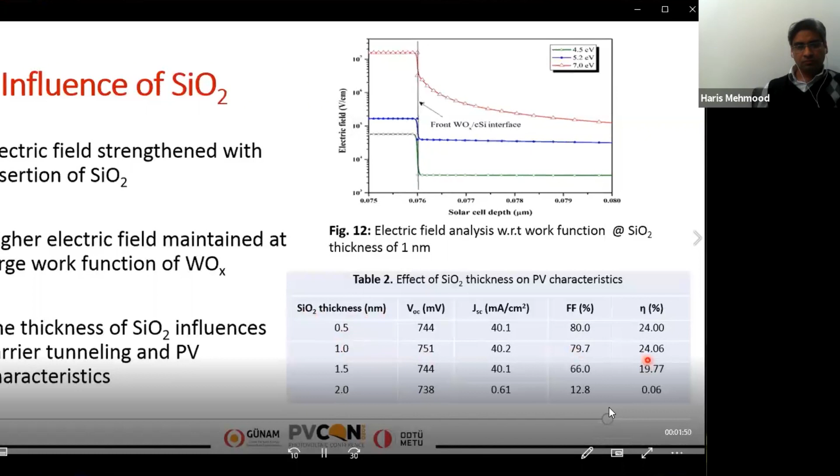The thickness of the silicon dioxide also influences the carrier tunneling and the photovoltaic characteristics of the proposed device. We have seen that the optimized thickness of 1 nanometer of passivating silicon dioxide would warrant a conversion efficiency of around 24%.

Finally, I will discuss the comparison of the reference device with our proposed device. The reference device that was fabricated has an efficiency of 20.79%. The same structure was simulated with the same set of parameters as employed in our work, and it showed a conversion efficiency of 20.88% for the reference device.

So our proposed device has a better open circuit voltage, equal to 751 millivolts, because of the large work function of tungsten oxide, and better current density, better fill factor, and better conversion efficiency of 24.06%.

In conclusion, the solar cell structure based on tungsten oxide and titanium dioxide as hole and electron selective contacts has been simulated with Silvaco TCAD. The higher work function of tungsten oxide assists in lowering the energy barrier for holes, thereby improving the photovoltaic performance, the reduced interfacial defects assist in increasing the photovoltaic performance, and a low electron affinity has to be used for the titanium dioxide.

Smaller oxide thickness promotes enhanced tunneling of the charge carriers, and a thickness of 1 nanometer has been simulated and taken as the optimized thickness for this proposed solar cell.

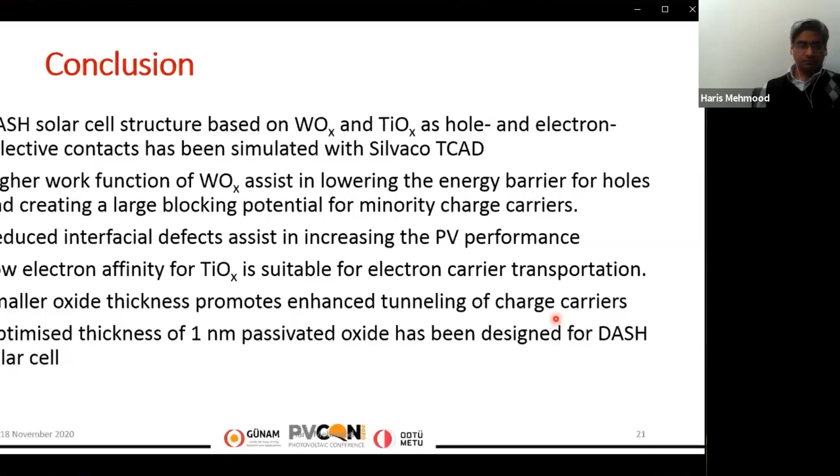Thank you, Haris, for this nice simulation study that you have just showed. I'll have one question. Your simulation can be as good as your assumptions, so I will ask you a question about your assumptions at the contacts. You use tunneling, Fowler-Nordheim you said, right? Yes, tunneling mechanisms used. So how accurate do you think those mechanisms are, and how can we make this simulation superior? What experimental and simulation methods can be merged together so that we can get more accurate

simulations at those interfaces? So first of all, we need to take the parameters. The simulation parameters should be derived from the experimental values. In this case, we have used experimental data such as the refractive index data, the optical dispersion data, as well as the band gap of the tungsten oxide, as well as the molybdenum and tungsten oxide work function. All these parameters have been taken from experiments, and those data have been incorporated into the simulation studies, and then we have performed this simulation on

the Silvaco TCAD. As I have shown on the last slide, there was a comparison of the reference structure with our work. For that reference structure, the data for the amorphous silicon, the crystalline silicon, as well as p-type amorphous silicon and n-type amorphous silicon were all taken from experimentally derived data. We incorporated those data and then further optimized it, for example optimizing the light reflection. If the experiments assumed 10%, I further optimized it to 5%, which means we are further reducing the reflection of light from the top surface.

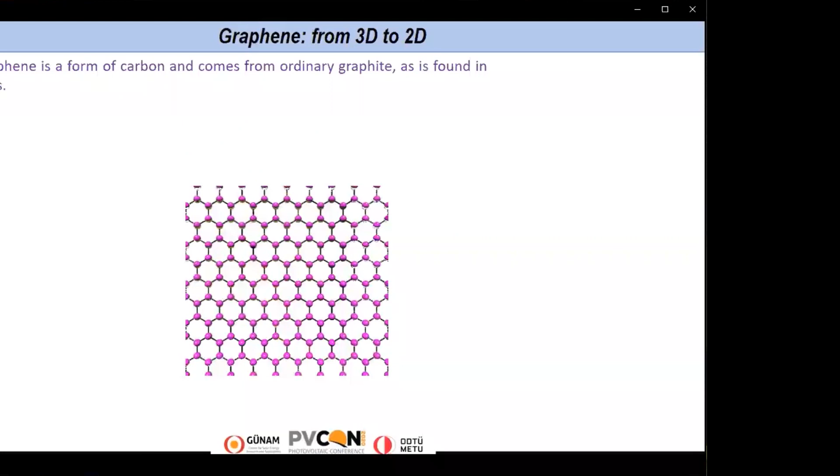Firstly, what is graphene? Actually, we know this material. When we write something with a pencil, we leave many graphene layers on the paper. Just for your imagination: 1 millimeter of graphite consists of 3 million graphene films. It means that we are talking about the thinnest material. On the other hand, graphene is the basic building block of other forms of carbon, such as fullerene.

And graphene has most of remarkable properties, such as 98% optical transmission, high mobility, high thermal conductivity. In addition, when we check other properties of graphene, graphene is more transparent than glass, stronger than steel, more flexible than rubber, lighter than paper, more conductive than silver. These remarkable properties make it available for large-scale application areas, especially solar cells.

Indium tin oxide is one of the available TCOs, which is also commonly used. However, ITO has some disadvantages, such as limited resources, and ITO is brittle. For this reason, we are investigating other types of TCOs, for example, doped zinc oxide. And in this presentation, I will talk about molybdenum doped zinc oxide, I mean MZO. In fact, I will provide some solar cell results with MZO and a hybrid TCO, which consists of MZO and graphene.

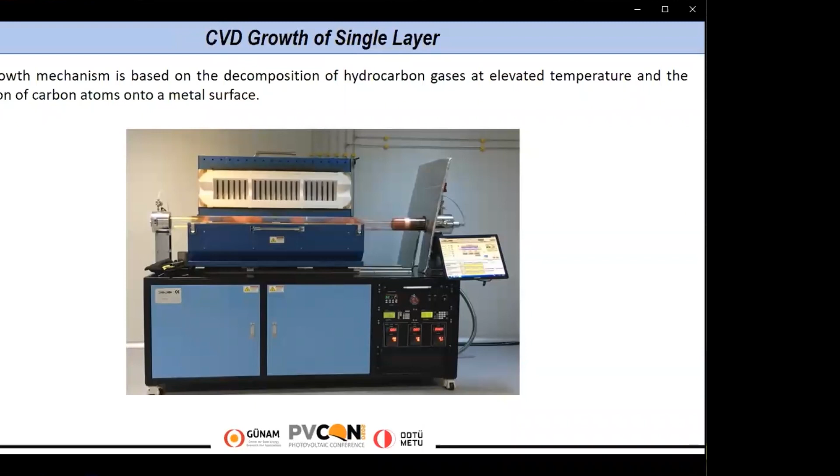There are a few methods for graphene synthesis. Chemical vapor deposition, CVD, is one of the most popular methods because of large-scale and homogeneous graphene synthesis. The growth mechanism in CVD is based on the decomposition of hydrocarbon gases at elevated temperature and the diffusion of carbon atoms onto the metal surface. Many parameters are important for graphene synthesis: substrate, flow rates, and temperature. Even your gas purity can affect your graphene quality seriously. So most parameters should be optimized for large-scale graphene synthesis.

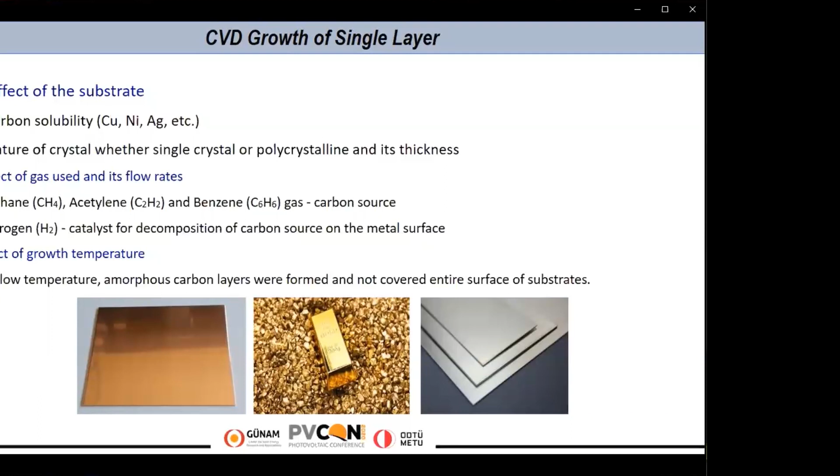We used polycrystalline copper as substrate. 30 minutes growth time was applied at 1000 degrees Celsius for single layer graphene synthesis. On the other hand, the graphene layer should be transferred for solar cell application. We are using a wet transfer technique, which is called polymer supported transfer. The polymer we use is PMMA.

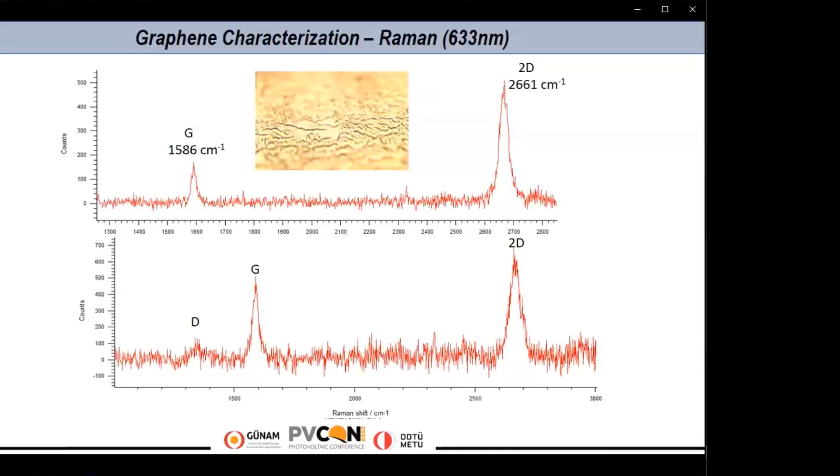Zinc oxide electrical and optical properties can be enhanced by doping. And zinc oxide can be improved by molybdenum doping. Molybdenum atomic radius is close to zinc, and molybdenum atomic radius is 0.042 nanometer and zinc atomic radius is 0.074 nanometer. So molybdenum doping is easier for zinc. Molybdenum gets into the zinc oxide structure.

There are a few methods to fabricate MZO films, such as PVD, CVD, sol gel. MZO films were fabricated using the sputtering technique in PVD. 10 different sets of samples with different thickness. We fabricated MZO films from 50 nanometers to 500 nanometers. The reason we investigated such a large range is to find out the best film thickness in terms of optoelectronic properties. By the way, we didn't apply any pre or post annealing to the fabricated MZO films.

When we check the MZO films' optical and electrical properties, when we increase the MZO film thickness, sheet resistance decreases. On the other hand, with increase of MZO film thickness, optical transmission wasn't affected seriously. Generally, MZO films' optical transmission is 75%. This result can be related to the MZO crystalline structure because we observed the same result with aluminum doped zinc oxide and gallium doped zinc oxide. And we know from literature that when we increase the film thickness, at the same time we enhance the crystallinity. So sheet resistance of MZO can be decreased with increasing film thickness, and optical transmission wasn't affected seriously.

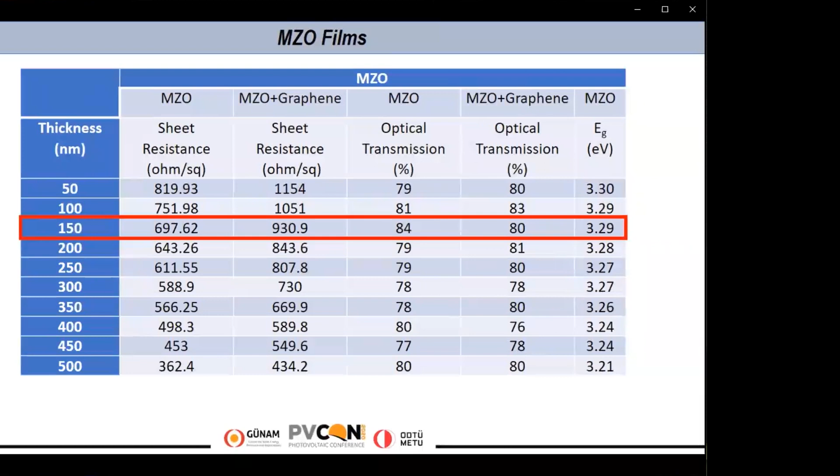In this figure, we check the 150 nanometer SEM image of MZO. In addition, we can see the XRD pattern for the 150 nanometer MZO film, and crystalline size is about 58 nanometers, and we also check the other values in this table.

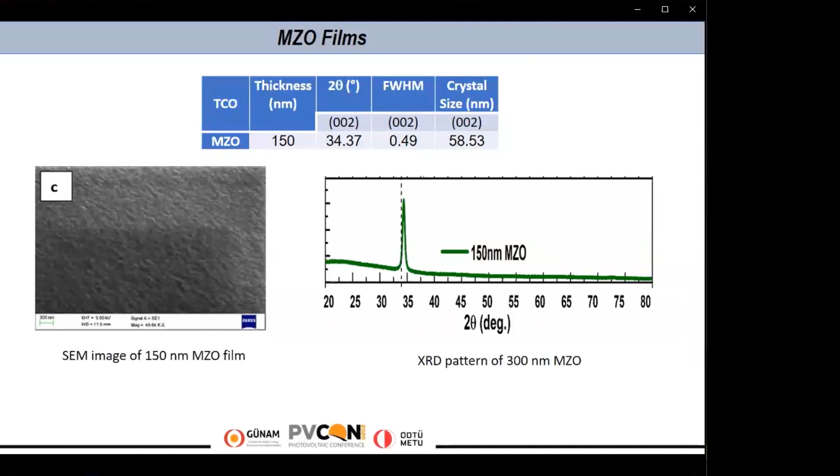1-inch MZO and hybrid solar cells were fabricated, then cell efficiency was measured by solar simulator, so that MZO and hybrid solar cell efficiency were compared with each other. When we investigate MZO and hybrid solar cell efficiency, the MZO solar cell has 12% efficiency, and the hybrid solar cell has 15.5% efficiency. Solar cell efficiency was increased by graphene.

Most parameters are reported for solar cell efficiency, such as fill factor and open circuit voltage. Fill factor was decreased in the MZO graphene hybrid structure. This is related to graphene having high sheet resistance, because high sheet resistance can limit fill factor. However, there isn't a serious decrease in fill factor.

On the other hand, VOC was increasing with the MZO graphene hybrid structure because graphene has a higher work function than MZO. MZO work function is approximately 4.1 eV, and the graphene work function is 4.5 eV. So we increased our solar cell efficiency with the graphene and MZO hybrid structure. It means that MZO and graphene can be used as transparent conductive electrode for solar cells, especially silicon-based solar cell structures.

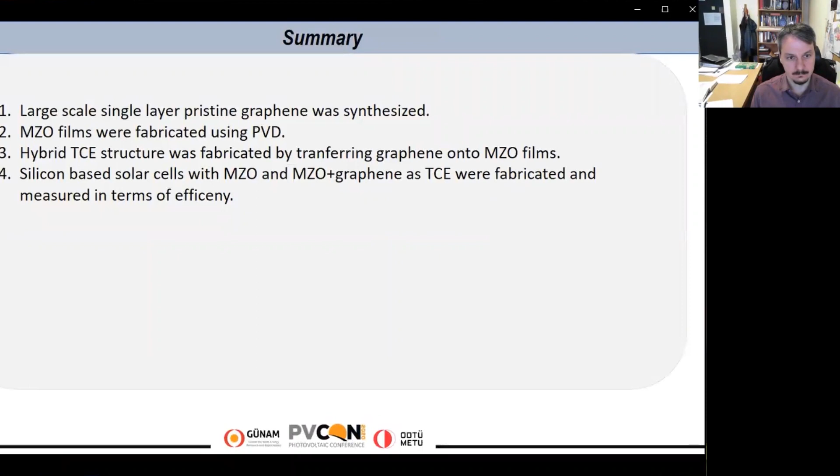Large-scale, single-layer pristine graphene was synthesized. Molybdenum doped zinc oxide films were fabricated using PVD. Hybrid TCE structure was fabricated by transferring graphene onto MZO films. Silicon-based solar cells with MZO and MZO graphene TCE were fabricated and measured in terms of efficiency.